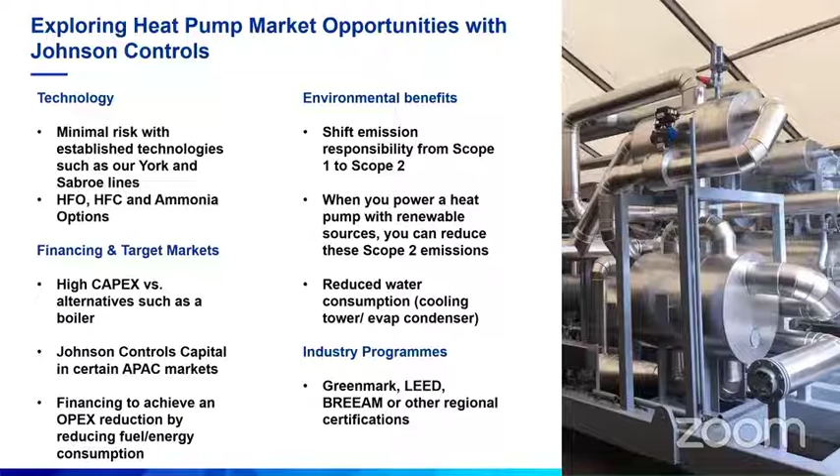So as I mentioned before, I'm in a team that puts all these solutions together. We recently brought some of the first financing deals into Southeast Asia. Why am I mentioning this? Beyond just the narrow heat pump topic, because what we see in the market now is not just a facilities director coming to us for a product or even an engineered product.

We see a lot of stakeholders alongside those facility managers, such as a CFO or a chief sustainability officer, that demand that we give a whole infrastructure as a service solution or a net zero as a service solution, alongside the heat pump. So we find now that it's not just about narrow focus on heat pumps - it's about adding scope 1, scope 2 emissions calculations.

It's about adding, let's say, a chiller upgrade, some HVAC optimization, and some renewable energy, helping with green attributes. So heat pump is definitely a growing piece of the puzzle, but we find that it has to be an integrated solution to satisfy what the customer is going for. Yes, there are standalone deals, but based on the deals we've closed and the projects coming up, it's part of a broader mix - a financial savings play and an emissions reduction play.

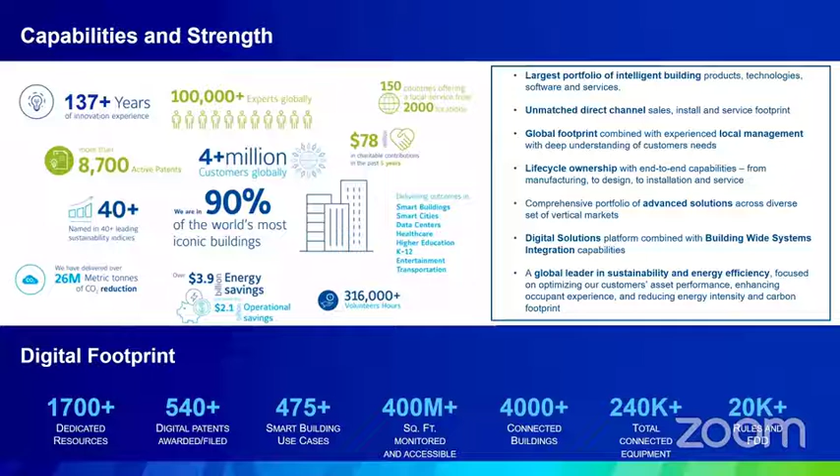So I'm just wrapping up here. Just a little about us - we're almost 140 years in the business. We have 100,000 people globally and 800 people in Singapore and many more across broader Asia. So if there is interest on the call to work with us to identify projects and synergies, we're very happy to assess that and see if we can further the adoption of heat pumps. That is it from my side. I will hand over to my colleague who has some exciting case studies and specific information on heat pumps, and I'll be available for the Q&A shortly. Thanks everyone, see you soon.

My topic is basically zooming into the technical aspect of heat pumps, to explain how heat pumps work, what product types we have around in JCI, and how we do case studies for heat pumps so we can understand how to apply cooling and heating, and some sort of payback to understand where we hit the application of this heat pump in general for our industries around Southeast Asia. I will bring in about 30 minutes of our presentation, hopefully within this time frame we can understand more about how heat pumps can be applied in our applications.

Basically, a heat pump extracts energy from a waste heat source. From this waste heat source, we go through a refrigeration cycle. Heat pumps work on a cycle very similar to any chiller cycle you've come across. From the heat pump cycle, which goes to the compressors and condensers, waste heat will be rejected to the condenser side. From the rejection of heat, we extract this in the form of hot water, which contributes to the heating requirement of the plant, or useful heating. This is comparable to, let's say, a boiler, which does direct boiling heating to generate hot water through steam, steam condensers, and so on. That's the big major difference between a heat pump, which goes through a mechanical thermodynamic cycle, versus a boiler.

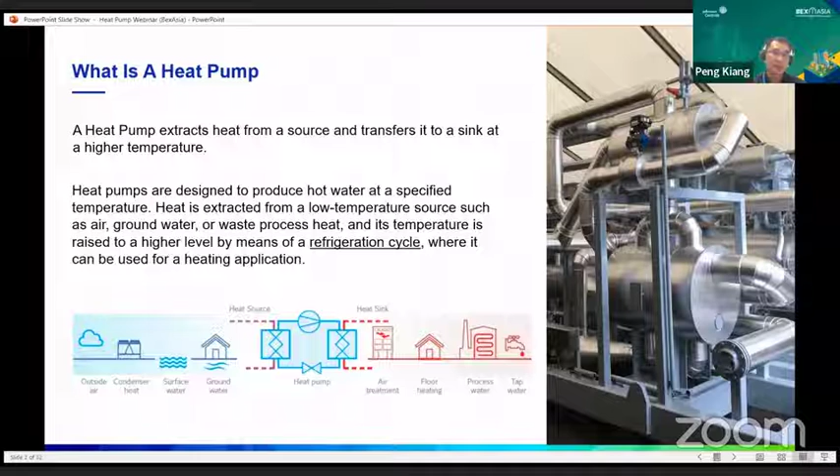That is a very classic and simple definition of a heat pump. Hopefully the audience can understand roughly how this heat pump cycle works in a very cyclical manner. The efficiency of the heat pump is typically more than that of a boiler, which is a thermal machine in that case.

The benefits of heat pump implementation, which Luke covered a little bit just now - the broader aspects are, first of all, there will be economic benefits and savings. So operational cost saving from the use of boiler fuel versus a heat pump using electrical means to run the cycle to generate hot water. In my studies of heat pump applications and feasibility studies in food and beverage industries in Southeast Asia, we are seeing approximately 50 to 70% cost saving, depending on the heating mode, the temperatures, hot water required, the capacities, and the type of fuel source being used. From the customer point of view, the dollar and cents will be first to capture and attract them towards this kind of benefit.

Indirectly, as we reduce the cost of fuel, the running amount of fuel would also contribute to CO2 reduction and emission reduction in the carbon footprint of these industries. Depending again on the types of fuel these boilers are running, we could see something like 50 to 90% CO2 reduction, be it small or big amounts, depending on the industry they're coming from. That really speaks about the decarbonization step we are taking towards helping the environment.

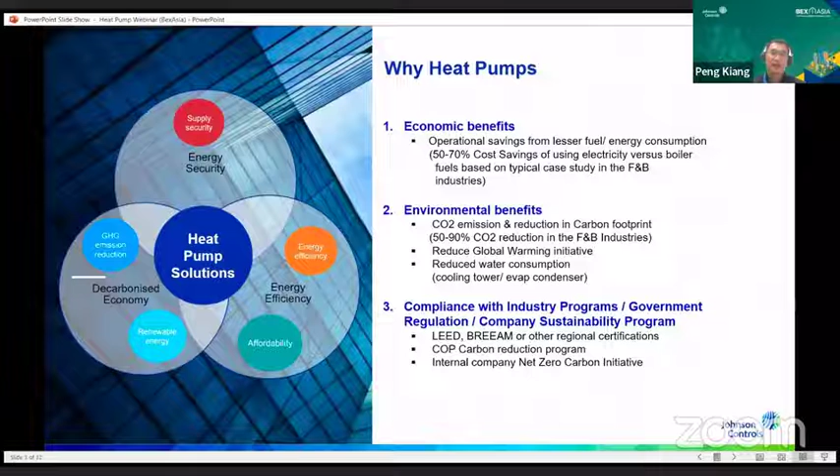So these are the three basic classic types of benefits why we're implementing heat pumps. Now, a little bit about the types of heat pump.

For some of the audience here who are new to heat pump technologies, heat pump has been around for quite a number of years. In fact, in Europe and so on, heat pump is a concept that's been used constantly because of different environmental applications. A very simple classic example is in our warm climate, we're using air conditioning systems all the time, and we reject the heat to the outside. So that is actually a form of heat pump - we're just rejecting the heat from a cooling source to a heating source.

Now, in the European countries' perspective, where there are 4 climates, when it comes to winter, what they need is more heating than air conditioning. So they have to pump heat from outside towards the room inside to do heating. So that is a sort of basic understanding of a heat pump, where the useful energy is used for warming, for heating purpose, versus that of air conditioning.

With that kind of principle, you can see we can develop many types of heat pump, from using air as a waste heat to creating hot air as useful heating, as air-to-air heat pump, or it could be water to air, which is using cooling water or wasteful water to generate some heat source and creating hot air on the other side, which is water to air heat pump.

And of course, most of the classic types of heat pump you come across is water to water heat pump, which is basically you can use all kinds of water as a source of energy and creating hot water through the heat pump on the other side. So there are many types of heat pump existing in the market, from commercial types to industrial types, but basically the same principle applies - to actually create useful heating from the waste heat source, or to do parallel cooling and heating at the same time.

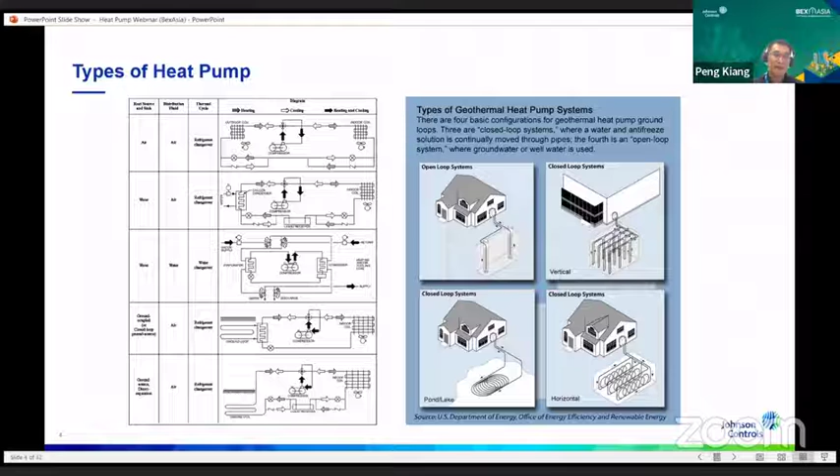All right, so just to give you some understanding about heat pump. Now, in terms of those who are a bit more into the technical understanding of heat pump.

Heat pump and chillers operate on an almost similar cycle, except chillers operate at a lower temperature and lower pressure cycle to create chilled water. So your chiller controls the chilled water temperature as your temperature output, and that is your control point of a chiller. Whereas in terms of heat pump, it is operating at a much higher level of pressure to create more hot water on the condenser side. As a result, your control point will be the hot water output of that chiller or heat pump.

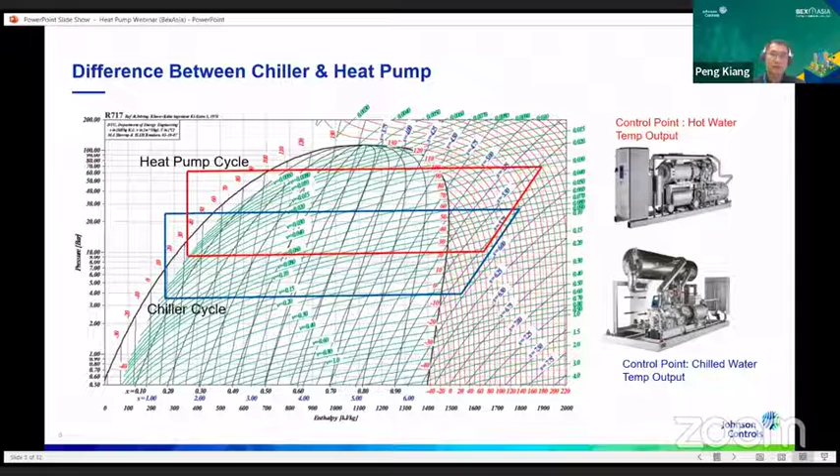So that is the sort of the two basic differences. Some people get confused between chillers and heat pumps - that is the basic definition. So chillers, you create chilled water as your control point, while heat pumps create hot water on the high side of the heat pump.

Now, one thing to define about chiller efficiency, or heat pump efficiency, is COP. COP stands for coefficient of performance of a particular machine or chiller. It defines the useful work of a chiller or heat pump divided by the input power, so it's a ratio of the output energy divided by the input shaft power to the chiller.

In terms of the ratio, the bigger the number, the more efficient it is to run a particular heat pump or chiller versus other kinds of machines. If you look at the COP definition of a basic chiller, let's say we have 5 units of cooling and 1 unit of input power, so the COP, the ratio of efficiency, is 5 divided by 1, giving a COP of 5.

Now, if you look at the cycle of the chiller itself, all this energy has to be rejected out to the condenser, so that will be 5 plus 1, which is the output of heating. If you want to define a COP of heating, the useful energy of 6 divided by the power input of 1 gives you a COP of 6 for this kind of heat pump. So that is individually defined as the ratio of each cooling COP and heating COP.

Now, many practicing engineers today look at cooling COP and heating COP separately. If we combine these two together, and use this heat pump chiller to create both cooling and heating as useful forms of energy, then these 5 units of energy for cooling and 6 units of energy for heating can be combined together with just 1 unit of power. So that combined COP is much, much higher than either individually for cooling purpose or for heating purpose.

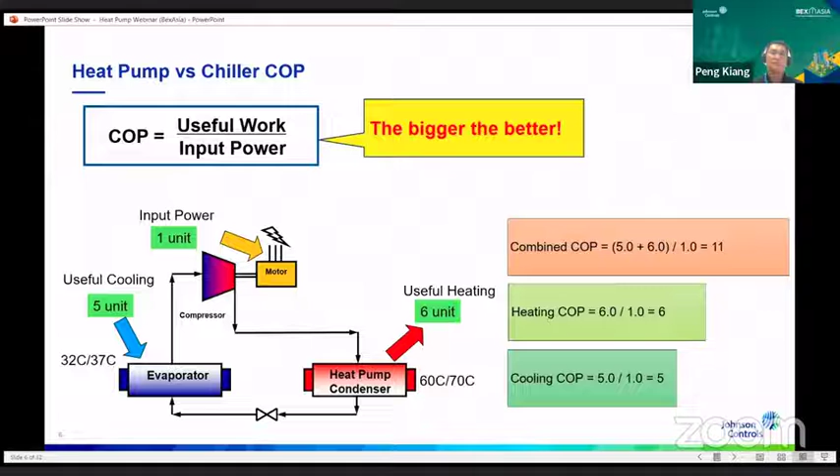So that is the overarching idea behind how a heat pump is so much more useful and so much higher efficiency than a boiler.

Okay, so following this trend of thinking, the difference between a boiler to generate hot water versus a heat pump. If you look at the diagram on top, it shows a basic boiler thermal machine which purely burns fuel to generate 100% of heat to the factories. So you're consuming 100%, in fact even more, 110%, because the efficiency of any thermal machine would always be less than 1 due to heat loss and other kinds of losses in the boiler itself, and you have close to 100% emission of CO2.

if you're using very unclean fuel. So this is a very unsustainable way of heating in any industry. Boiler is a very unsustainable way of heating, but the world has been using this practice for a long time, for many kinds of reasons.

And if you look at the comparison of a heat pump, below the diagram, you can see that instead of 100% energy being converted from fuel, you only use 25% electric power, and the rest, 75% of the energy, comes from a waste heat source. This waste heat source can actually come from a factory, because in any factory there's always parallel cooling and heating happening at the same time.

And some heat rejection - if you can rechannel this energy back through the heat pump, you can imagine that the efficiency of the heat pump is definitely much higher than a boiler. And you can actually reduce the carbon footprint by going through a heat pump cycle like this, while still creating 100% of the process heat required for the factories.

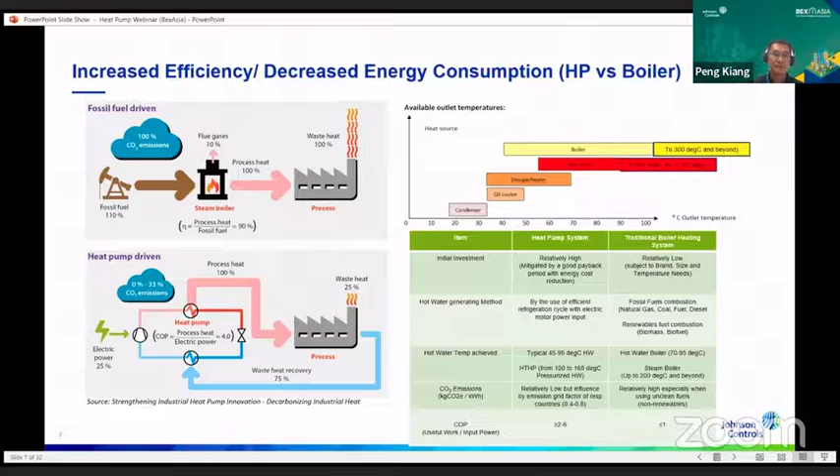Okay, so how do we apply heat pump? Actually, heat pump can be used for almost any industries you can think of, where you have parallel cooling and parallel heating at the same time. You can see that we have a lot of energy sources in the factory, which come from air, from water, from ground, from even oil cooling, compressed air.

There's a lot of compressed air in factories where the compressed air oil has to be cooled down by radiator, by water. So this could be one potential source of energy which can go through a heat pump to create useful heat for various industries.

So this industry could be from dairy, breweries, pharmaceuticals, boiler preheating - so you preheat the boilers before it goes up to the boiler itself, saving some energy from the fuel. Refineries, which need a lot of heating. Meat processing plants, which need pasteurization, reheating, and so on.

And even the HVAC industry itself, because in any AHUs there's a humidifying process, a dehumidifying process, and also reheating to control the RH through the use of hot water - warm water in that case - and some air heating as well. So there's a diverse kind of industry we can actually apply a heat pump in.

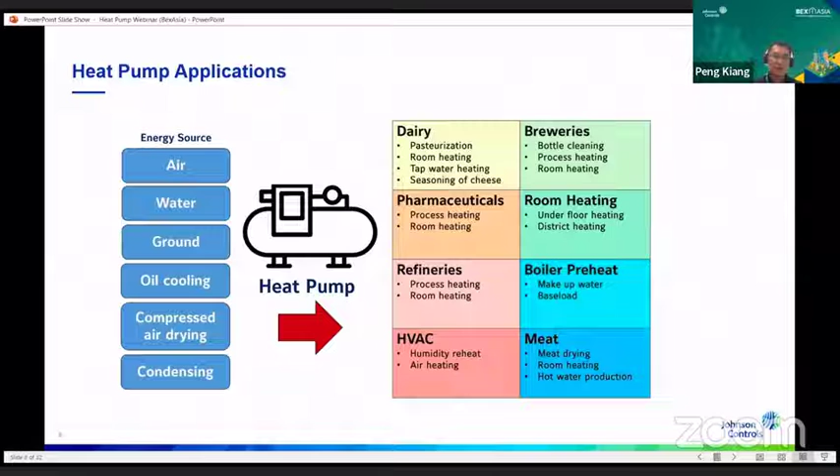Now, I just want to share with you a little bit about how we can actually generally apply heat pump, through various types of schematics that I want to illustrate. So for this particular illustration, we are talking about waste heat recovery, where we extract waste heat from any condenser source.

It could be an example of an ammonia condenser, which is typical for many ammonia plants around Southeast Asia, whether it's a food and beverage plant or cold storages. And this excess ammonia heat would have been wasted to the condensers. But what if we could tap this waste energy into our heat pump, which is what we call a cascade ammonia heat pump?

And then, using this waste energy from the condenser side, we could actually produce hot water on the other side of the heat pump condensers. For example, 90 degrees could be one source of hot water we could produce for process heating. So that's one way to tap into this waste energy source of the condensers.

The other example on the right side you can see is actually a cooling tower plant. So in many industries, and even in many commercial buildings, there'll be many cooling towers rejecting heat from a chiller system outside into the environment. So what we could potentially use again is to tap this energy source.

So pre-cool the cooling tower waters before it goes to the cooling towers, and use this waste heat to create useful energies for the process. Again, could be 40, could be 90 degrees, 80 degrees, 70 degrees hot waters, depending on the pressure level we are compressing on the heat pump.

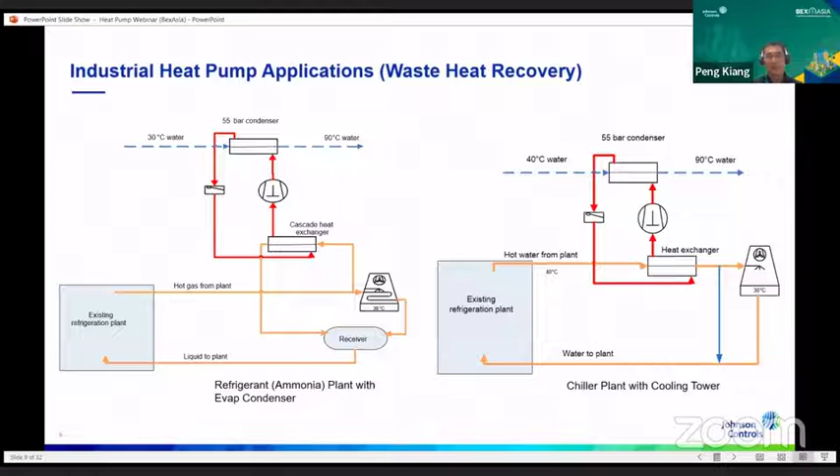So these two are very classic examples to do waste heat recovery from a plant. You would save energy from condenser fan, water cooling tower pump, and you could also save fuel at the same time, because then you relieve the energy of the boiler to produce hot waters, since you have some waste heat that you can use to do this.

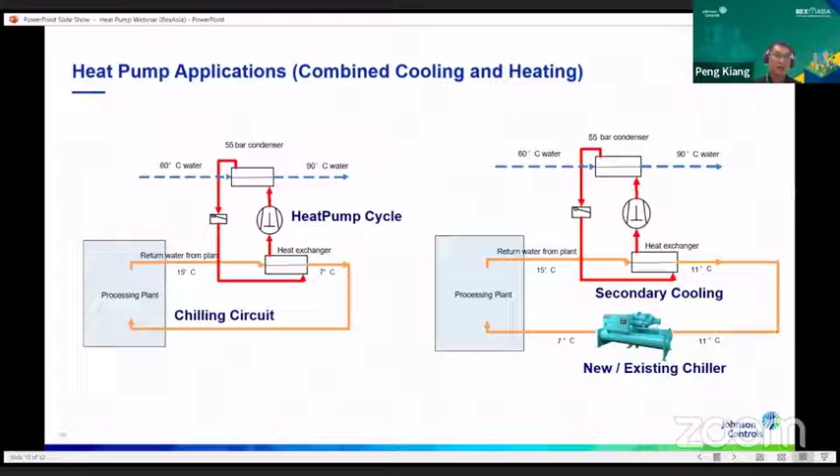Plus, of course, some other savings on the cooling towers and water pump as well. It is really a powerful application to tap into the kind of synergies you can produce with parallel heating and parallel cooling at the same time. Of course, there are many ways of applying this heat pump, depending on how high the hot water temperatures you need for your process, and whether you need this cooling water for any other applications.

Here is one actual example where we could tap into free cooling of the air through an AHU, and produce chill water to pre-cool this AHU, from which you can scale up to bigger heating capacities on the other side, whether it's for pasteurization, clean-in-place, product heating, oil heating, syrup heating, all kinds of heating could be done by this heat pump. So even though the free cooling of the air is a byproduct of this heat pump, this cooling air could still be used for many factories around Southeast Asia where the environment is hot. So this is one useful way.

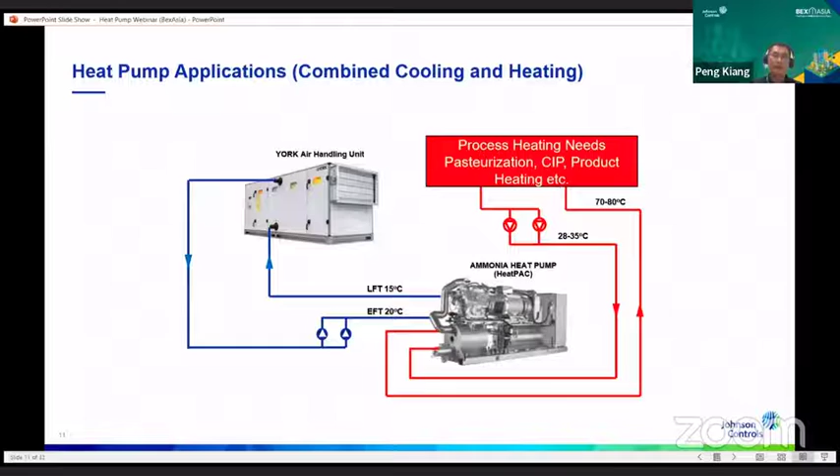But of course, the focal point of control here is the output of the hot water temperatures rather than the free cooling. Another example I can show you is, let's say, if you need the AHU to control your room temperatures, and you also need some dehumidification or RH control on your heat pump or AHUs. Typically, many industries use either boiler steam to control the RH, or some other means of warm waters.

Now, through the heat pump here, which is actually producing chill waters to cool your AHUs, you could also produce parallel warm waters or heat recovery, about 45 to 50 degrees C, that can go into the AHUs for the drying effect, for what we call RH controls. At the same time, some of this excess hot water could also be used for shower, laundry, and cleaning.

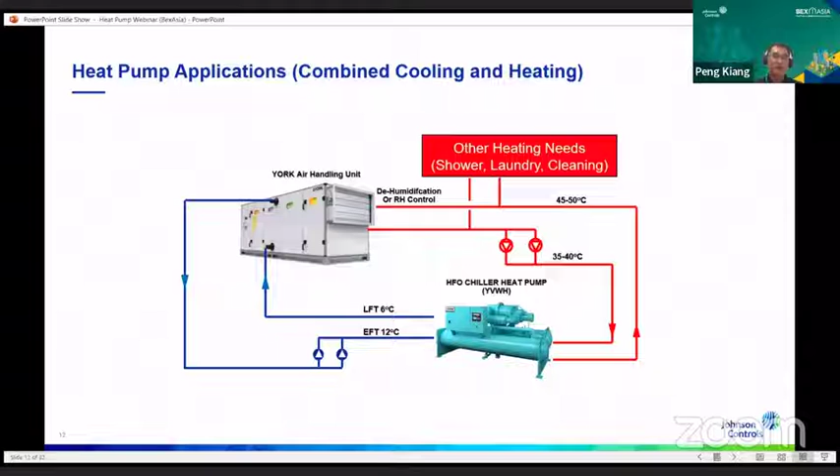So just this typical example to show you the kind of benefits we could get of a heat pump combination.

Now, in terms of our product portfolio, heat pump compressors have many types, right? From scrolls to centrifugals to reciprocating compressors. And you can see here, heat pump covers all kinds of temperatures we can develop, from standard temperature hot water to high temperature hot water.

For standard temperature hot water heat pumps, you could actually use any of the Freon refrigerants, or even HFO refrigerant today, to do the heating. And of course, higher temperatures require higher pressure compressors, and we'll also be using more natural refrigerant, which is ammonia or even water, to produce very high temperature heat pump applications. So that just gives you a flavor of our product development in terms of heat pump.

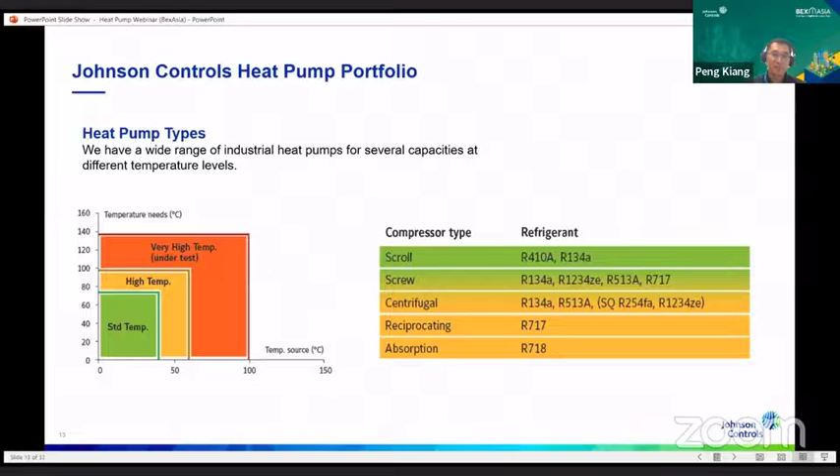And this is the kind of air to water heat pump which we have also in the family, where we can cool the air and generate hot water on the other side.

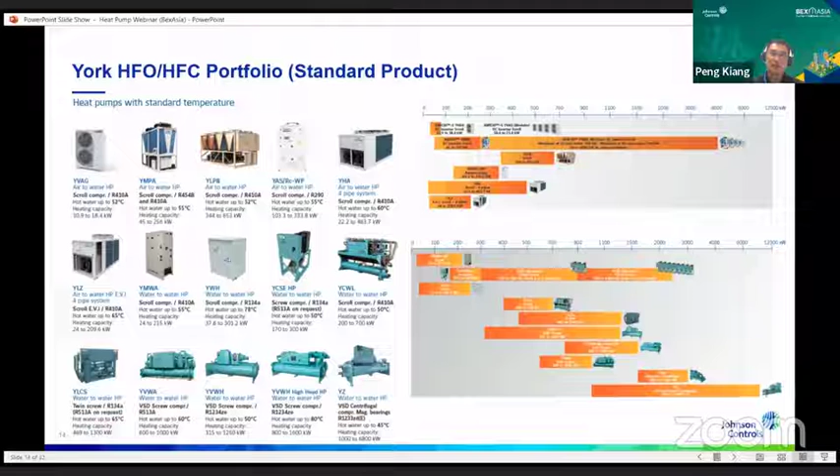And also some water to water heat pump, which is using primarily some HFO refrigerant for lower heating temperatures, about 50, 60, maybe up to the highest about 80 degrees C, depending on the types of screw, high pressure screw we're using. And a bit of some customized heat pump as well for some very large heating, high temperature profile.

You could have multi-stage centrifugal compressors that can generate hot water up to maybe 90 degrees C. And in terms of capacity, it can scale up to maybe 5 megawatts to 20 megawatts of heating capacity, mainly for district heating applications around European countries, and perhaps in the future in China as well, doing major district heating through the use of heat pump.

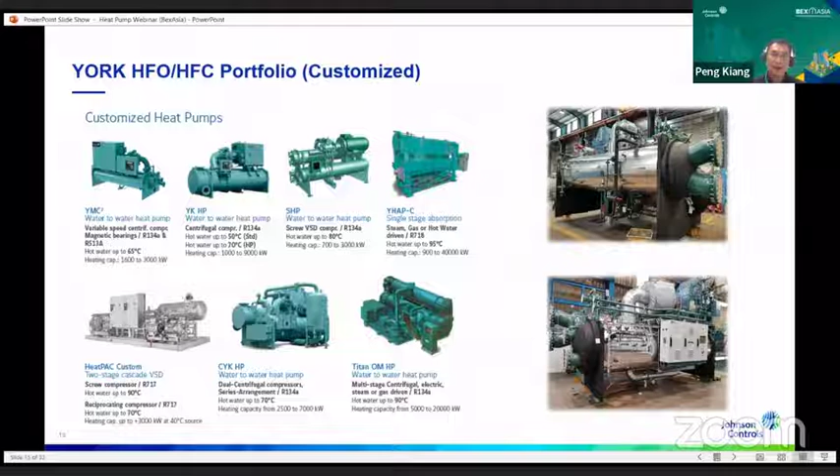And to be more sustainable in the future, as we move towards more sustainability, ammonia heat pump is also a very classic example of how we can use heat pump to generate hot water up to about 90 to 95 degrees C. It can cater for very large water delta T on the hot water side, from maybe 30 degrees to about 90 degrees. So that's a very useful application of a heat pump in this case.

So our heat pump product, in this case, using natural refrigerant ammonia, can preheat water to about 90, 95 degrees, and we can also pre-cool water for heat recovery. And if you need a heat pump to do parallel cooling and heating at the same time - low temperature, 5 to 10 degrees C, and high temperature up to about 90 degrees C - you could even have a 2-stage heat pump, which is a DualPAC in our sense, to do that kind of parallel cooling and heating at the same time.

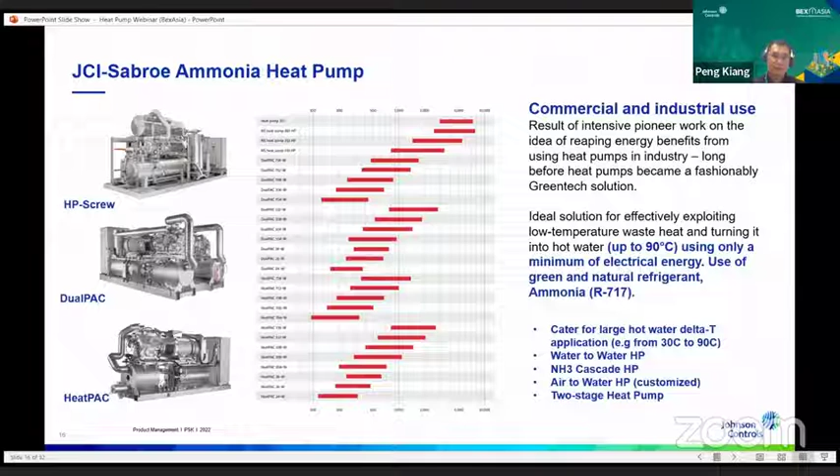Now, let me share a couple of case studies, which will be more interesting for us to really understand how we can apply this. So I have a couple of case studies which hopefully I will be able to illustrate through.

One of the cases I've done is in Indonesia, where we are using heat pump for laundry, CIP, and some dairy hot water requirements. This customer has a huge amount of boiler fuel that is doing boiling for pasteurization and many other things, and we are using about maybe 10% of that boiler fuel to do hot water from about 27 to 90 degrees hot water applications. So that translates to about maybe 308 kilowatt in terms of the heating capacity.

So we are using some waste heat source from the ammonia condensers to generate this kind of heating. And through the COP of the heat pump, which is about 4.1 in this case when we select the heat pump, we have some annual heating capacity and also annual cooling capacity we can extract from the existing ammonia plant and produce some sort of heating for that.

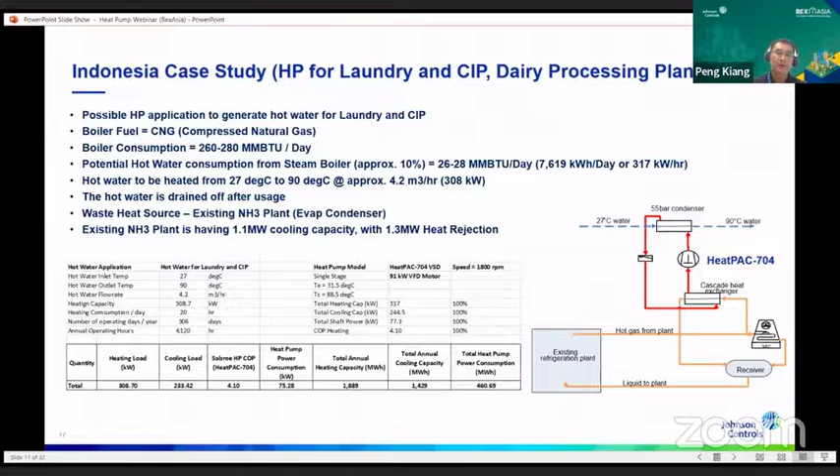So with this annual consumption of heating and cooling at the same time, we can also do an equivalent CO2 and energy consumption comparison from the boiler and the fuel consumption from the boiler. So just bear with me a bit for the small print - what we have here is actually a comparison between boiler fuel consumption and the heat pump electrical consumption to do the same amount of heating at the same time. So from the characteristics of the fuel, which in this case is methane natural gas, compressed natural gas, and the electricity bill that we can build out of this particular location in Indonesia, for example, we can actually do a parallel cost study between the two types of fuel consumption.

So we are seeing roughly about 60.9% of annual cost energy saving in terms of fuel between a boiler using natural gas versus an electrical source. That contributes to a certain amount of energy and cost saving in terms of fuel versus the investment cost of our ammonia heat pump in this case. We have roughly calculated a payback of about 5 to 6 years, depending on the cycle of operation of the heating and how often it's implemented.

At the same time, we also see some CO2 tonnage saving of about 28% in this particular case. So for this Indonesia customer, it's interesting to see the kind of cost saving, payback, and carbon saving we have.

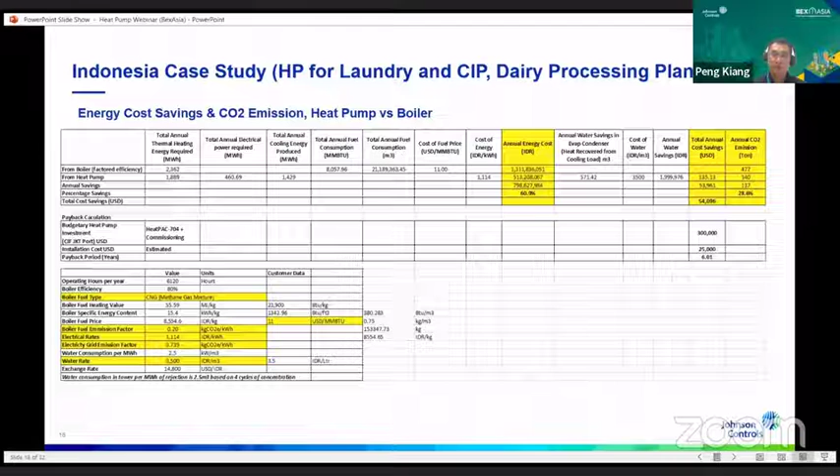Now coming back to a Singapore case, where fuel costs and energy costs are very different from Indonesia, I've chosen one particular case study where we have a heat pump on hot water processing. In this case, we are heating water from 57 to 80 degrees C, and this water is recycled back for reheating purposes, with about 40 million cube of water to be heated up.

In Singapore, most of the time, the boiler normally uses compressed natural gas. Then we have a heat source - in this case, a secondary cooling methodology. This is an existing plant where there's a chiller running about 300 tons of chilled water at the same time. So we're trying to use a heat pump to pre-cool the water at the same temperature and extract this cooling capacity to generate hot water on the other side at 80 degrees C. So you can imagine we're putting in a heat pump to do both cooling and heating at the same time, creating synergy of saving.

Based on this and the selection of the heat pump in this case, we can use our standard product, the HFO heat pump, a high temperature heat pump, to generate hot water up to 80 degrees and cool water down to 7 degrees.

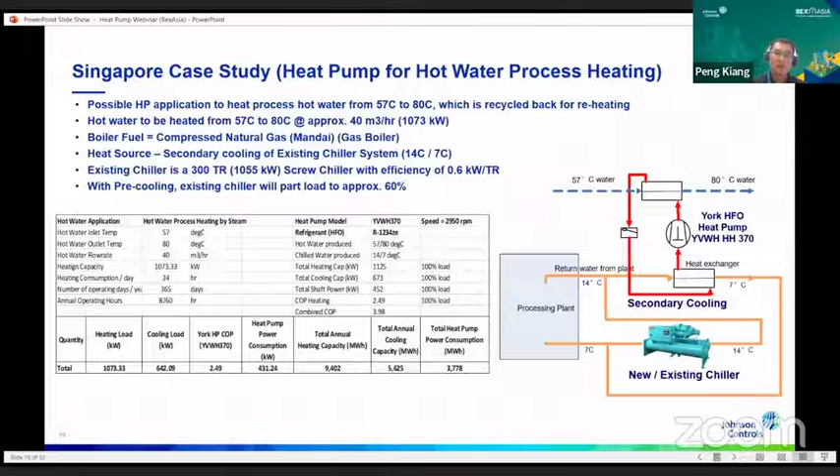Again, we're doing a parallel study between using a boiler with natural gas and the current Singapore rate of about 0.3247 Singapore dollars per kilowatt of electricity, and the boiler fuel at about 2.4 Singapore dollars per kilogram of mass of natural gas. We can see something like a 38% cost saving, which translates to quite a large amount of energy when you look at the cost of the fuel.

In terms of carbon saving, we're saving about 33% of the carbon footprint versus boiler fuel using natural gas compared to electricity from the grid via Singapore Power. These two savings are significant for us toward lowering energy costs and carbon footprint. In terms of payback, it's quite interesting as well, depending on the type of heat pump we're choosing - we're seeing less than a year payback. So it's very attractive for us to move forward with these heat pump case studies.

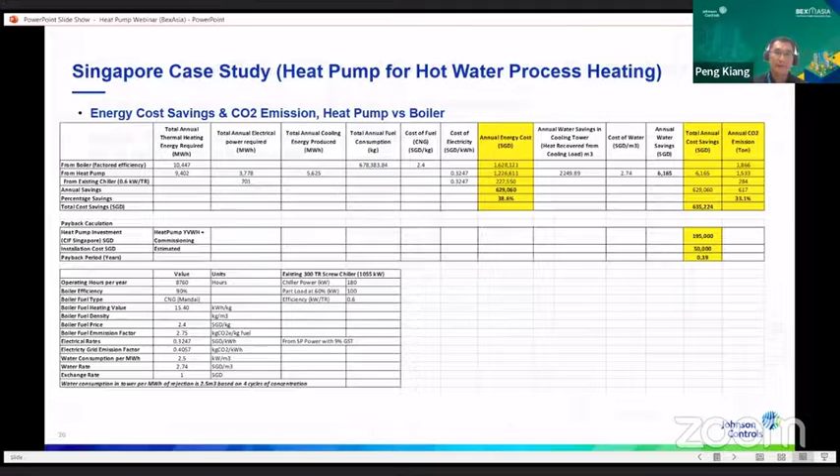Another case I've chosen is in the Philippines - a brewery plant. Philippines is famous for many brewery plants producing breweries, a very famous brewery. They are looking at producing hot water up to 85 degrees C, about 20 million cube per hour of water consumption. This hot water, for some reason, has been mixed with the products and isn't recycled. So they have to produce hot water using steam condensers from a city water temperature of about 28 degrees C to about 85 degrees C.

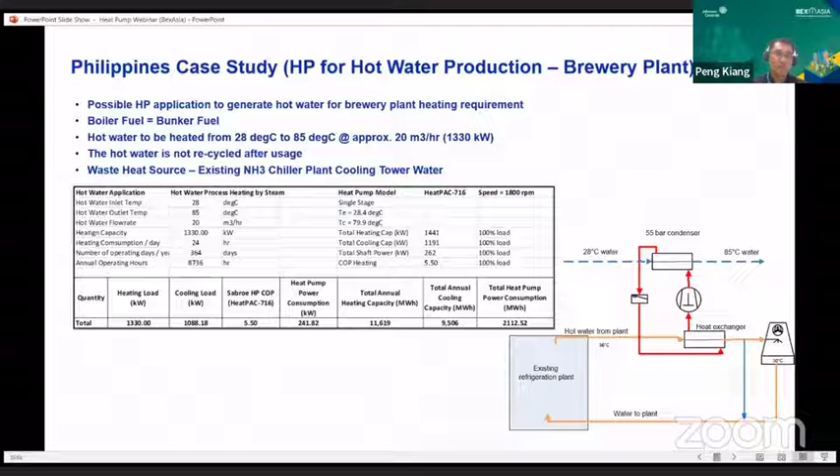So again, we have some waste heat source in this plant, which in this case is a cooling tower plant. We extract the cooling tower water, cooling it from about 36 to about 30 degrees C, and from that we generate hot water from 28 to about 85 degrees C. Using the same reasoning, we choose a heat pump with a very high COP of 5.5 on the heating side and consider the electric power it consumes. We again do a parallel study between boiler fuel consumption for the same heating process versus electrical heat pump.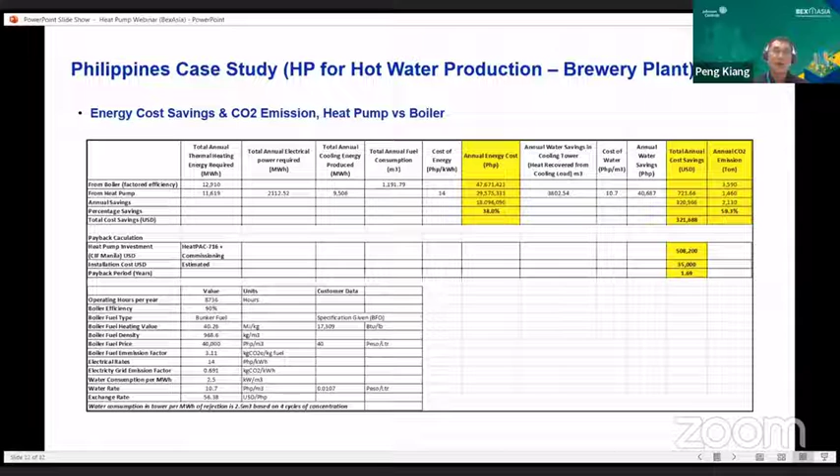So these are a few interesting cases, compiled with several kinds of customers we've come across in Southeast Asia. I've compiled here a number of cases across industries, the types of fuel used, from diesel boiler with coal to compressed natural gas, and the kind of heat source we're getting it from, whether from cooling towers or condensers, the hot water temperature produced, the annual heating capacities, the emission grid factors affecting CO2 produced from electricity used in the heat pump, and of course COP, and the kind of energy we can save.

So you can see there are varying factors affecting the payback for our ammonia heat pump, ranging from maybe 2 years to sometimes as far as 8.5 years, because those longer payback periods typically refer to customers using very cheap coal, which is a dirty fuel, and also the emission grid factors as well. So this is a very interesting compilation of all the studies we've done across different Southeast Asian countries.

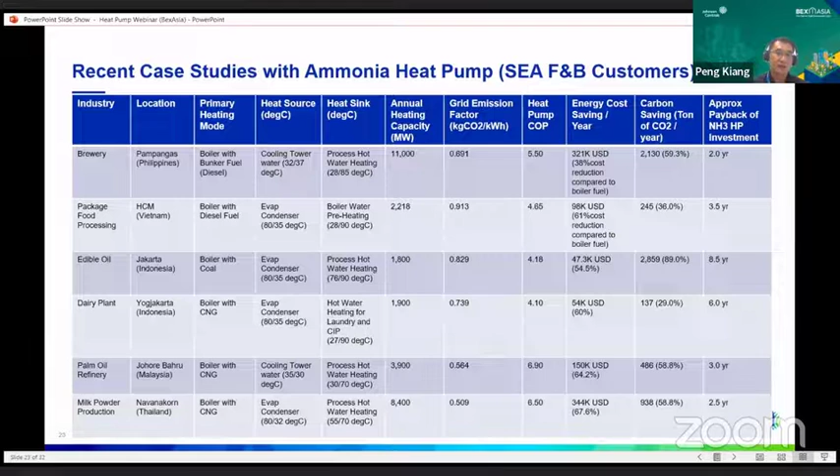A couple more slides to show you, in case we're able to go beyond the standard heat pump of 90, 95 degrees. JCI has developed a technology by acquiring a new company called Hybrid Energy that can give pressurized hot water up to about 120 degrees C. The intention is really to relieve a lot of the energy use that has been going through boilers as the means of generating hot water.

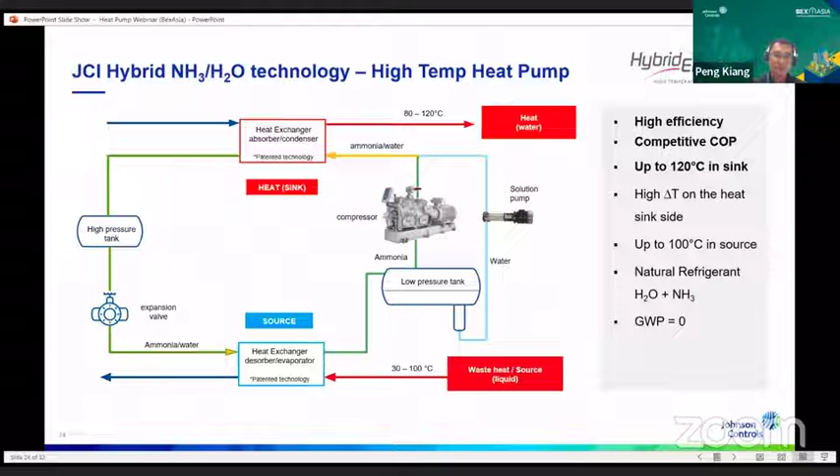So hopefully with more R&D and exploration, we're able to reach higher and higher hot water temperature heat pumps, or hot water steam heat pumps, in the future, relieving the job done by boilers and hence reducing our carbon footprint and boiler fuel consumption. We've installed a couple of plants around Europe using very high hot water temperature heat pumps.